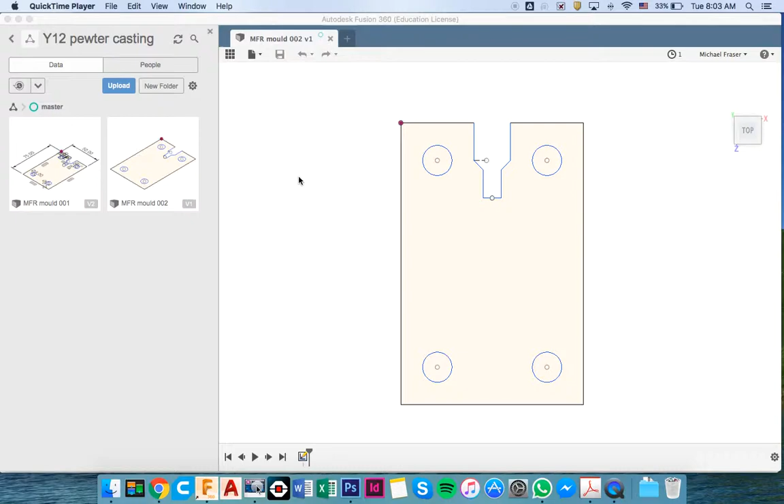Right, here we are for the second tutorial: how to attach a decal, or insert a canvas, into our drawing. So I've created a copy of that drawing and I've got it open here, all ready to go.

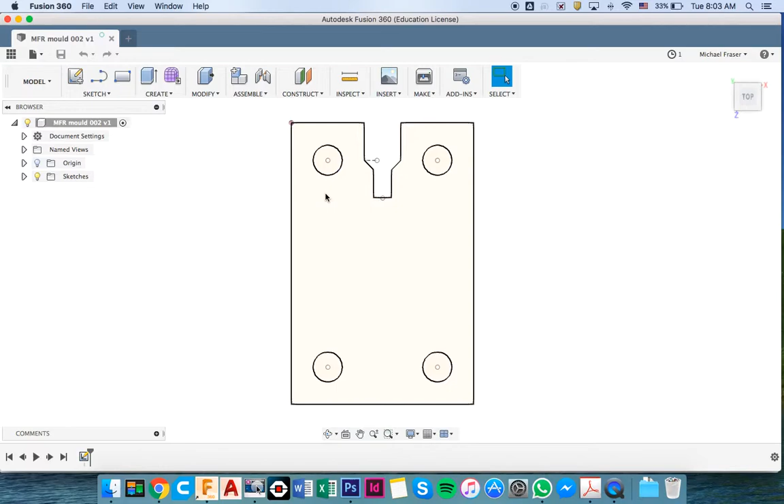Now before we attach the canvas, we need to draw a rectangle on here that we want the canvas to sit within. I'm just guessing, but I think if you can keep your drawing, your casting, within 35 by 35, that would be good. That would be close enough.

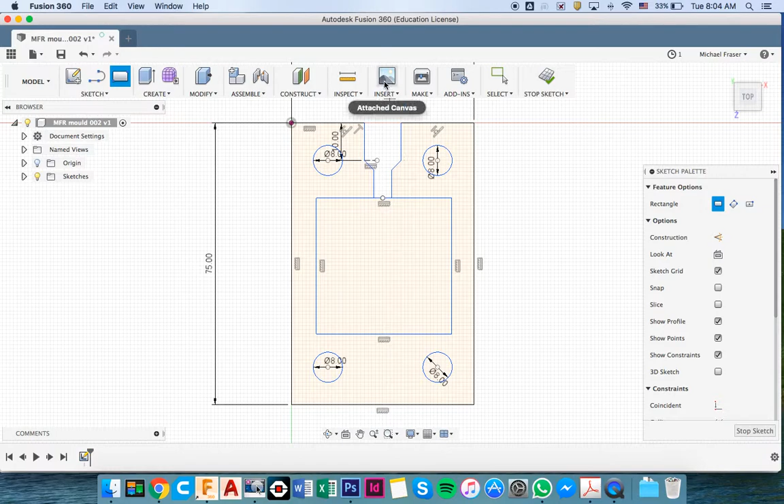And then we're going to just select this rectangle, and then we'll go Insert, Attach Canvas. Now you have to... I've already selected the face you could select, that's where you want the canvas to go, and now you need to click on here to select the image.

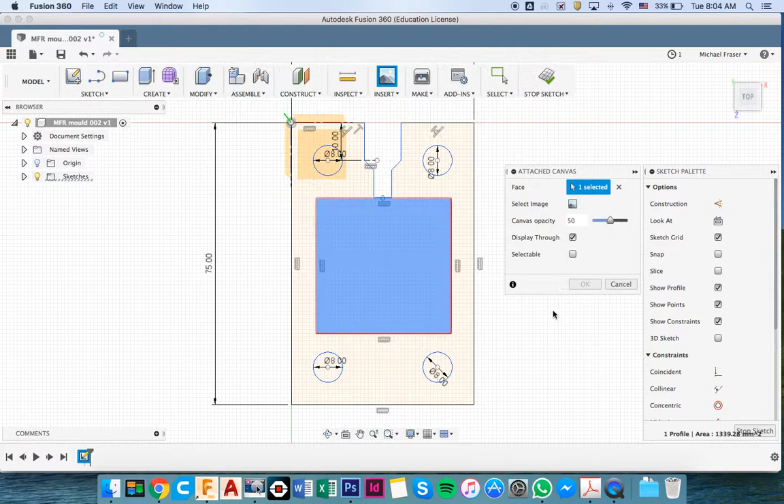Got the image here ready to go, and you can just play with the opacity a little bit. Now I prefer to have it very light so it's easy to see, and you can also play with the scale, so it looks like we need to make that quite a bit bigger until it fits. Yeah, that looks about right.

There we go, make it just a fraction smaller. Oh, it's not right.

Right, and I'm just going to drag it up and then drag it across so that the apex of this curve is connected to the funnel. Because when we pour the pewter in here, the liquid pewter is going to flow down through this funnel, and then it's going to flow into this shape. So we want that to be at the apex of the curve. So I'm happy with that. That looks good, okay.

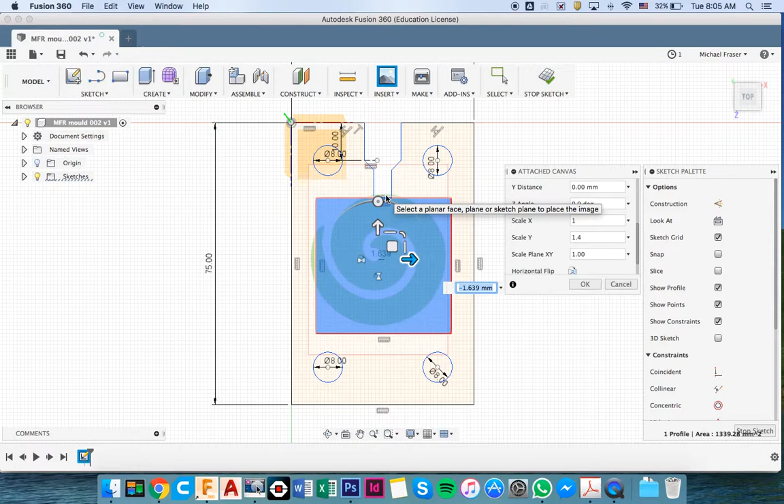And now we can trace that. So I find the best way to trace is to use the spline tool, the fit point spline, and then we can just click in here.

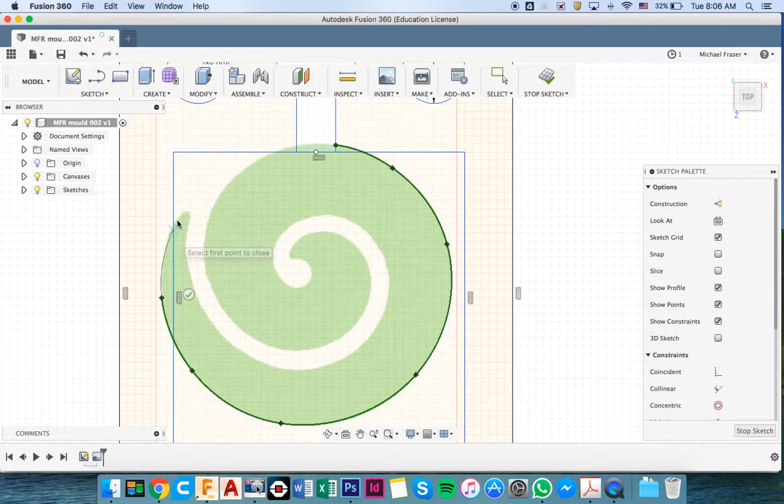Now to start with, you can be reasonably rough because you can come back and edit this easily later. Now when you've got a piece like this, you really need to zoom in and just do lots of little clicks.

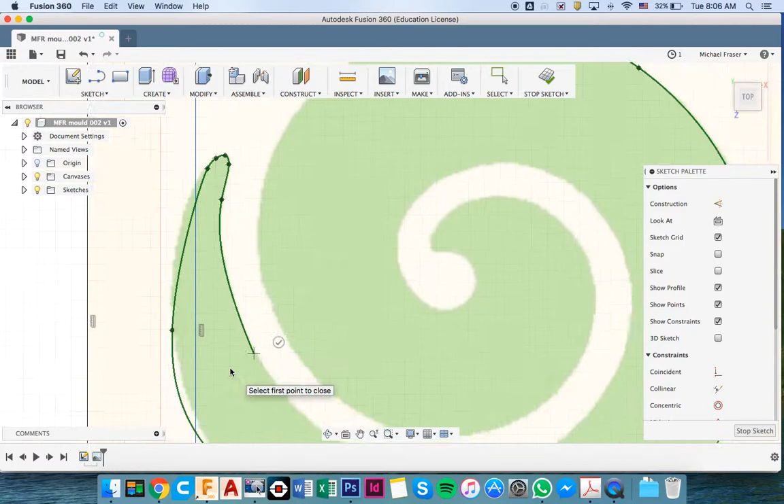Come back and look at how we can edit that curve in a little bit. Now this is quite a simple shape, and I actually suggest that you do a simple shape as well, but if you've got something more complicated, obviously it'll be a combination of straight lines and splines, but that's all right, you'll be able to work all that out.

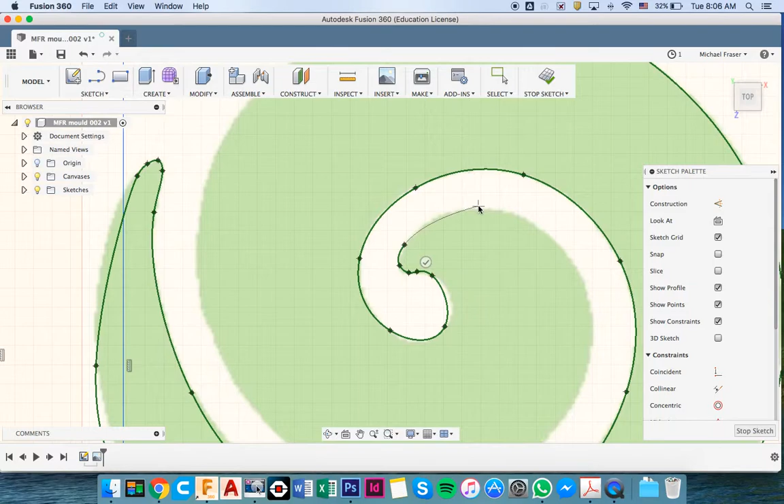I just think if you choose a simple shape like this one, you'll find that the pewter will flow better. You'll get a much better casting, much nicer piece of jewellery than if you were to do something that was too complicated or had too much detail in it.

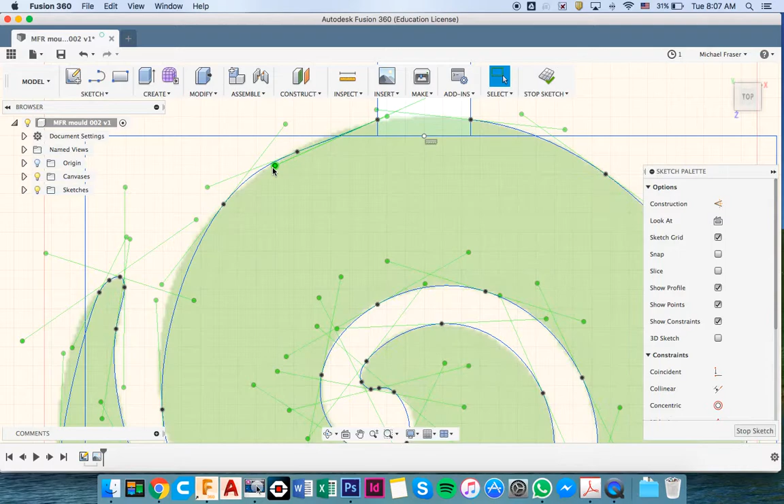Once you've finished, see how there's a loose end there, just press enter and it'll fix that up. And this is where you can go back and grab these little tools to just change the shape of your curves.

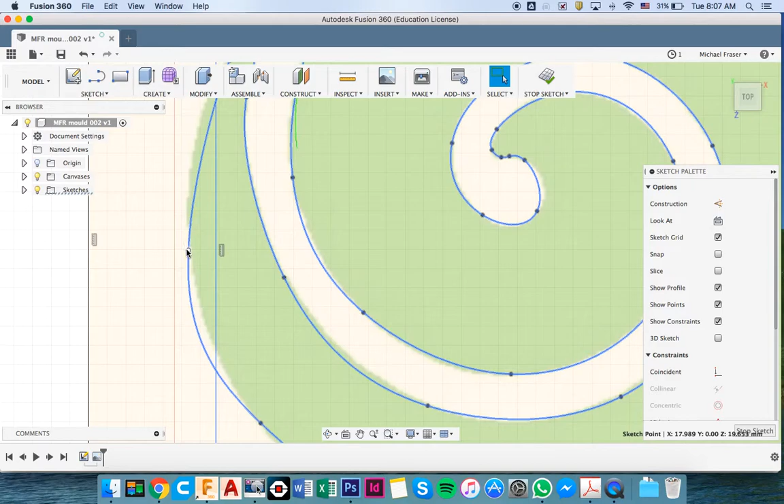So this one over here needs a bit of a modify as well. Otherwise, that looks pretty good. Let's just zoom out and check that. Just save there.

So that looks good. You can come back and I think we can delete the canvas from there. No, we'll have to roll it back. No, it doesn't like that. That's all right, that drawing's good to go.

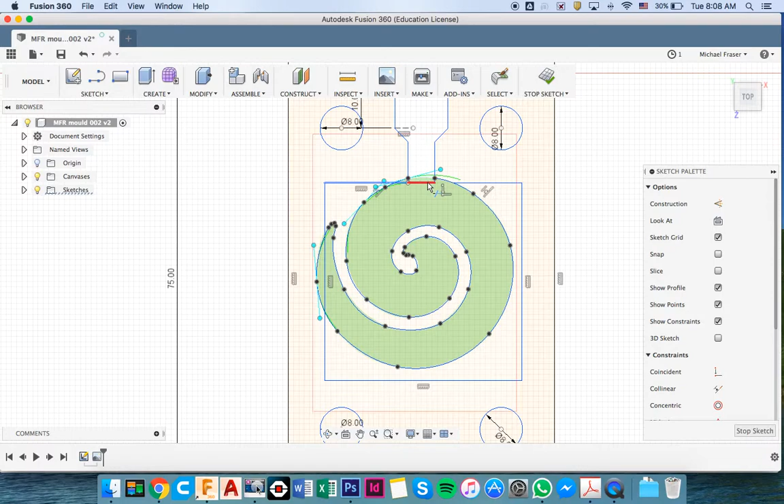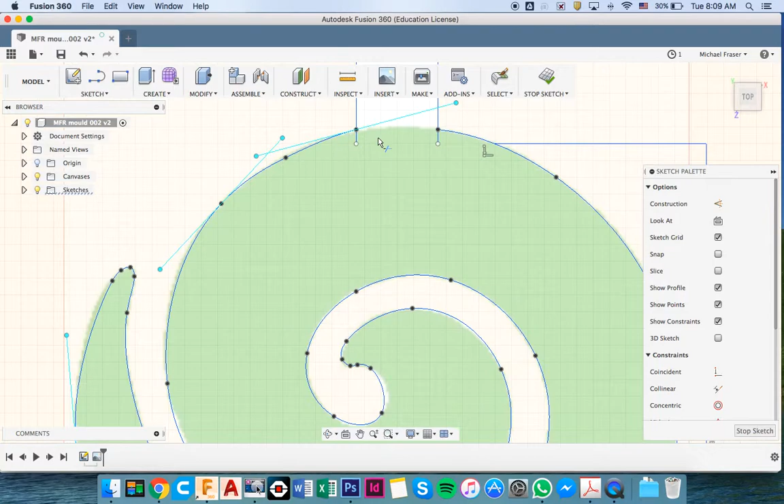Save it. We can now do some trimming to tidy it up. So all these lines here that are no longer needed... oh, there we go, it will let us. These lines out here, we should just be able to click on them and delete them because they're not a whole line, they should just delete it out.

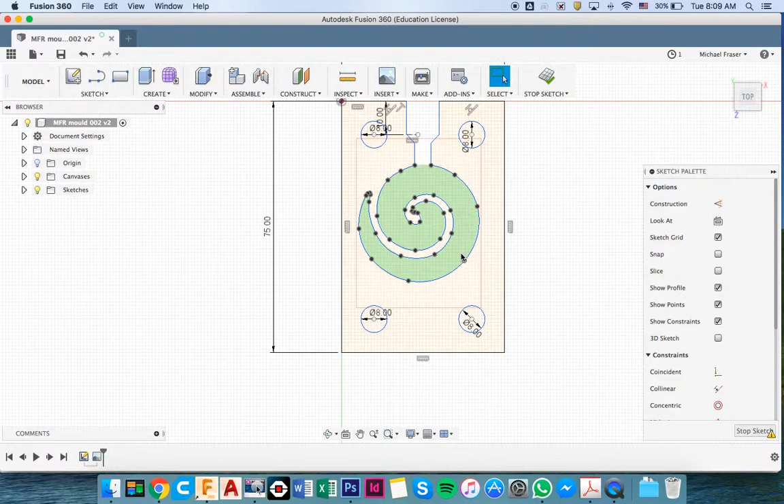There we go, there's our finished drawing. Now, this you'll see it's here under Sketch 1, and so you can at this stage two-finger click on there and save that as a DXF.

Name it, because when we take it to the laser cutter we need to know whose it is. Pewter mould 002, and then just save that there, and then we can help you laser cut that later.

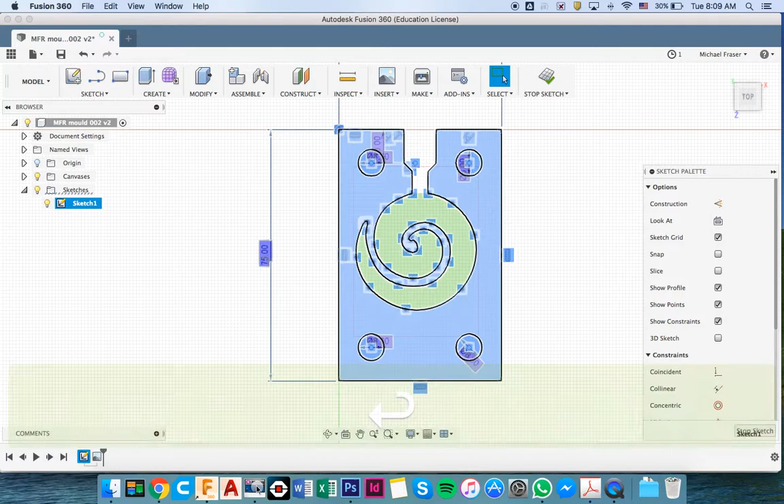Great, thank you. That's the end for the pewter casting tutorials.